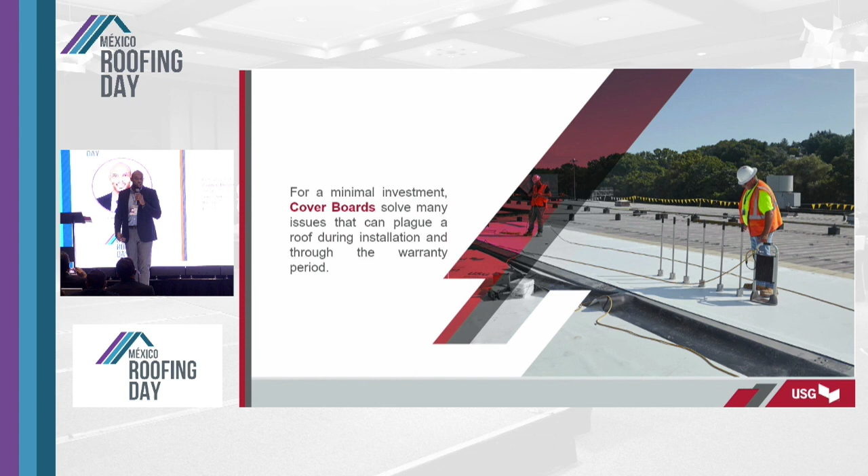All right, so just want to talk a little bit surrounding coverboards, why they're important, what it means for roofing, and one of the things that we all run into is there's so many different systems out there, right? Today we talked about BUR, we talked about PMMAs, different single-plies, so there's just a wide variety of different things that you can select.

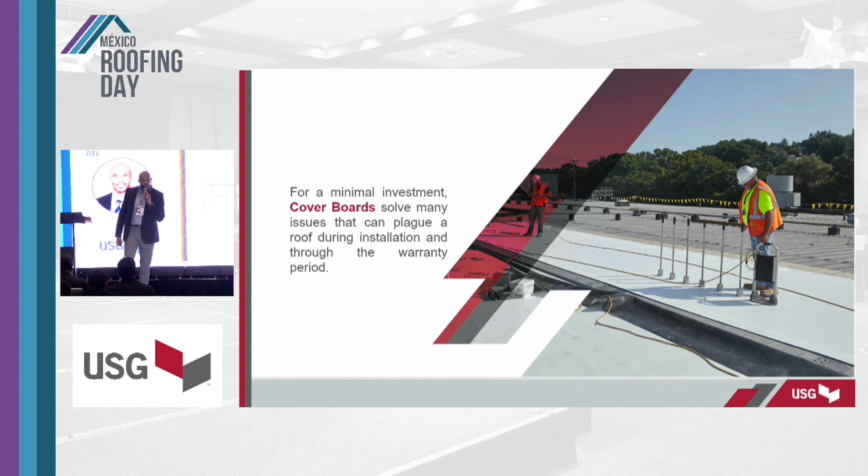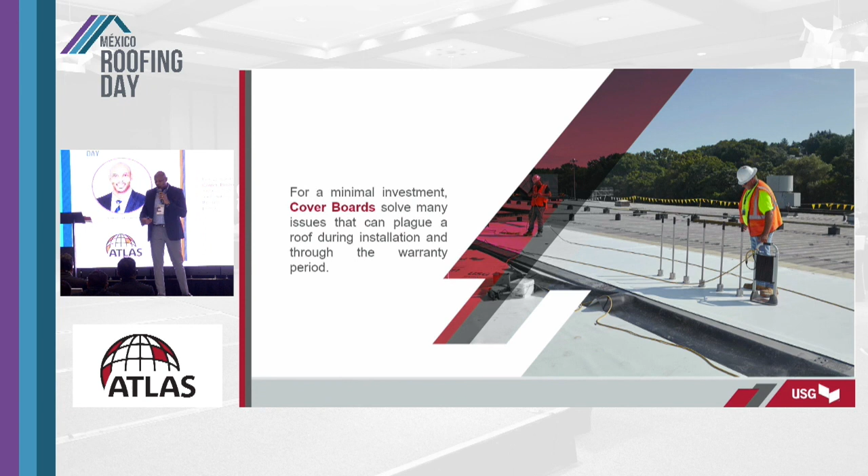From our perspective, including a coverboard in that system, which I know a few of the presenters mentioned today, will take that investment quite some ways, and I know even Brian from IIBEC talked about how it can come into a legal battle, right? And so including coverboards in there is just a small investment to protect that roof system as you move forward.

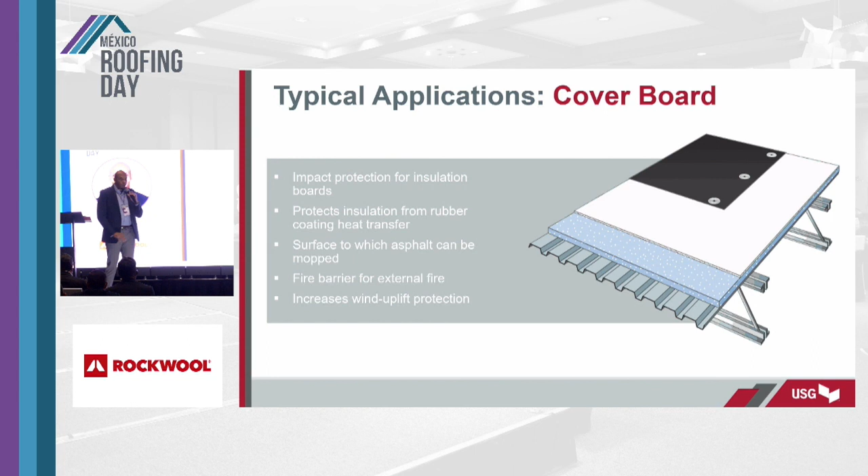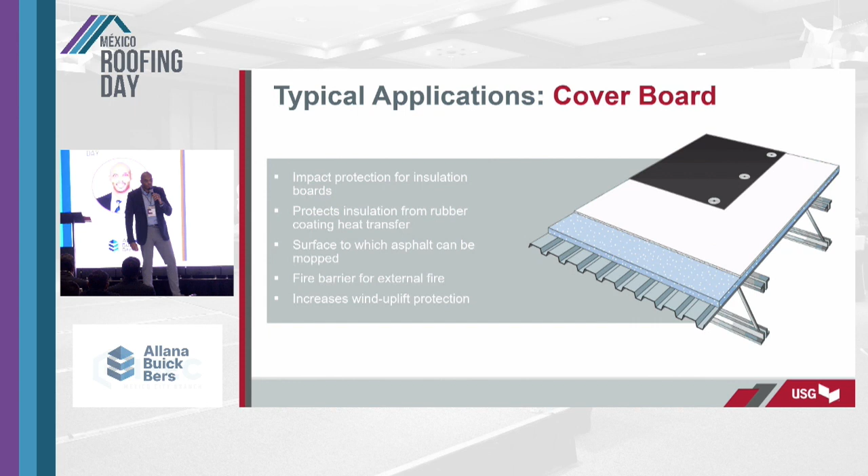So now talking a little bit about what that roof system looks like and where the coverboard comes into play. Number one, it's there right on top of the insulation, right below the membrane, to protect that insulation. It's there for heat transfer. A lot of times the contractors will fasten down the insulation and then low rise the coverboard on top of that, protecting it from the heat transfer from the fasteners going into it.

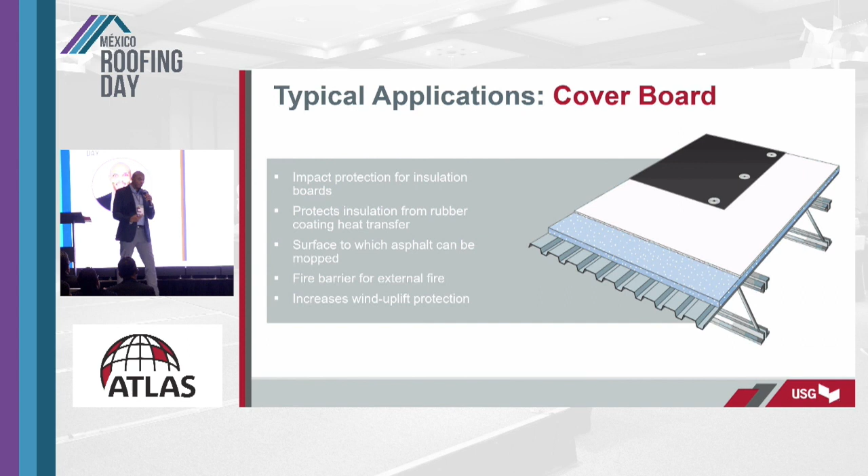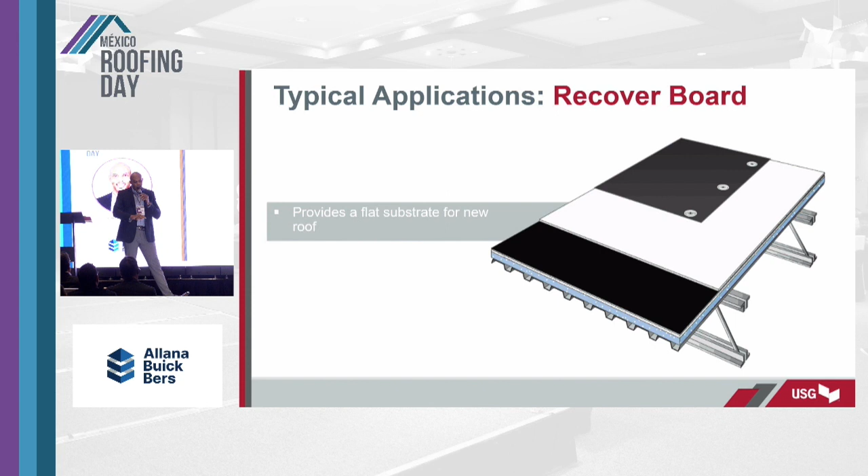It's a substrate where you can hot mop to, you can torch to, and of course it acts as a fire barrier, for wind uplift protection, and also hail. In addition, you can put it on an existing roof. So let's say your roof is towards the end of that life cycle. You want to put a coverboard on top of that for a nice, flat, clean substrate. It'll give you all the benefits that I talked about earlier, but also extend the life of that roof system. So in that application, it's a recoverboard.

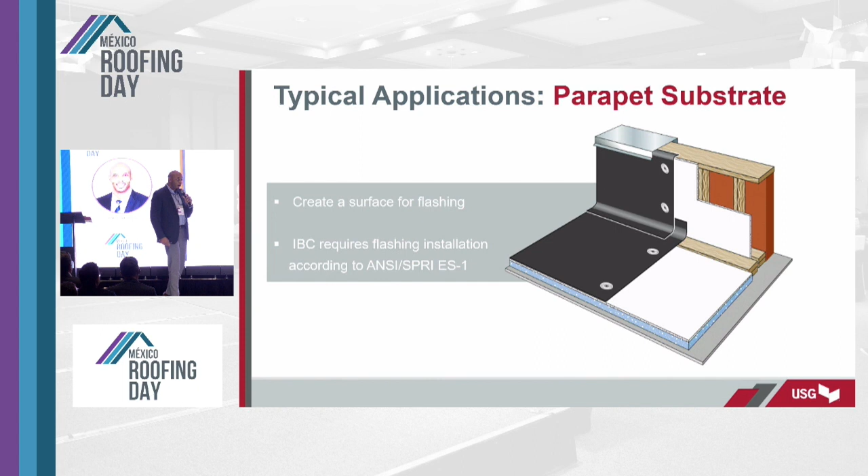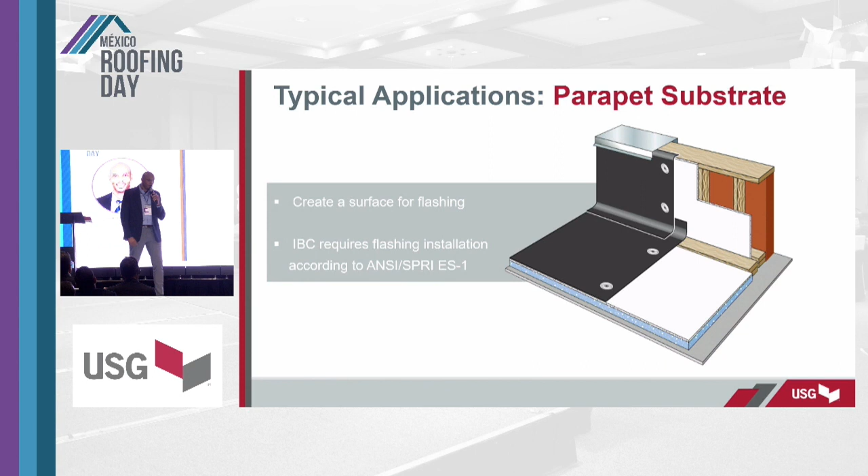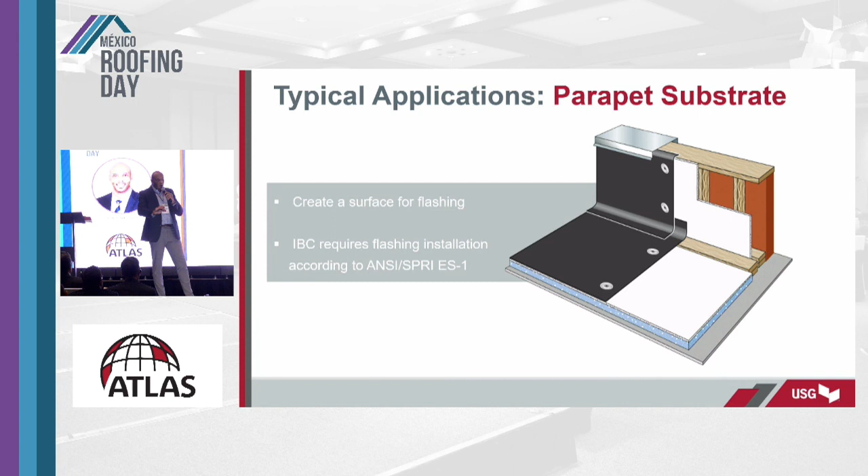And we talked about parapets today, how parapets are there for a fire application, and to enhance the wind uplift as well. So including a coverboard right on top of that parapet wall is important. Number one, it is the approved surface that you can adhere the roof membrane to. So whether it's single ply or mod bit or peel and stick, you can put that right onto the coverboard, which is on the parapet wall.

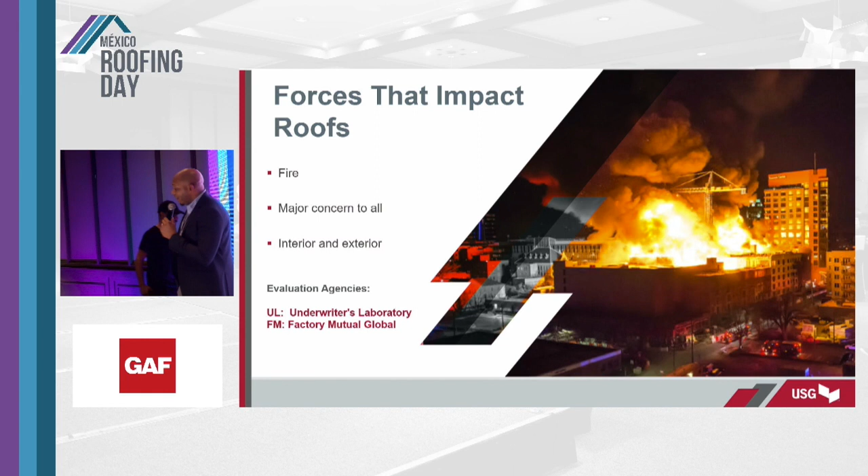So now we're going to talk a little bit about the different forces that impact roofs. I'm going to dive a little bit deeper into fire, maybe not as deep into wind as Melody talked about. We'll talk about foot traffic, and we'll talk about hail as well. So number one, fire, right? Fire is just a big concern. I know there was a presentation earlier that showed the Walmart building. That was pretty significant. And for insurance agencies, one of their biggest concerns is fire, hail, tornado, right? So they're always looking at those different things.

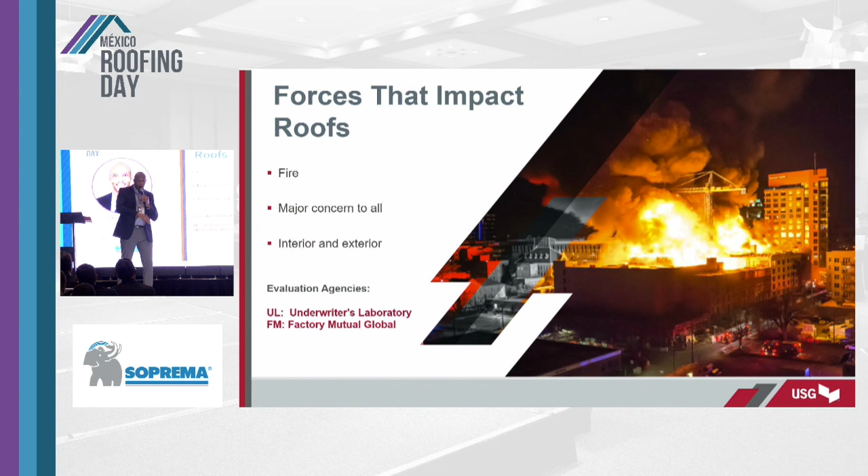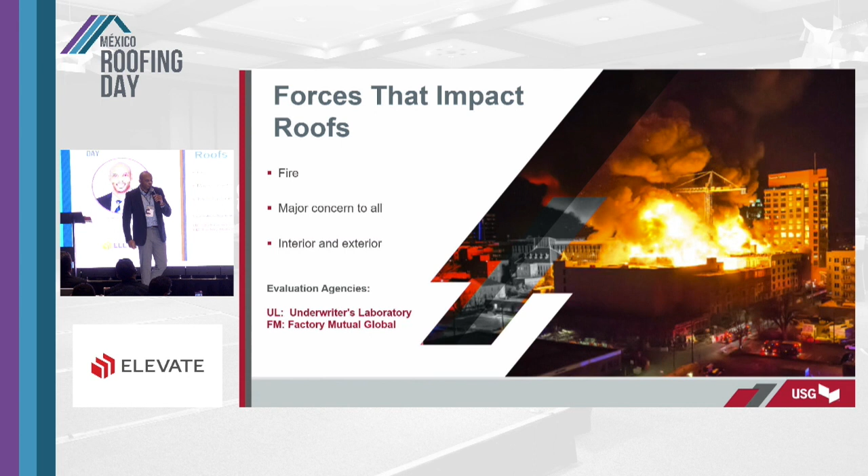And when you think about fire, you have to think about it from two ends, right? From inside the building and from outside the building, because it can occur from either end. And there's two different evaluation agencies that evaluate that. There's UL, Underwriters Laboratory, based in Northbrook, Illinois. And then there's Factory Mutual, based in Rhode Island.

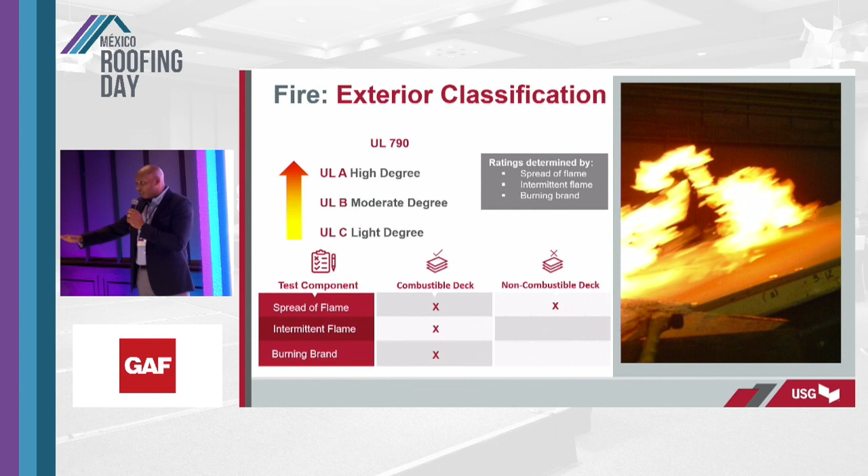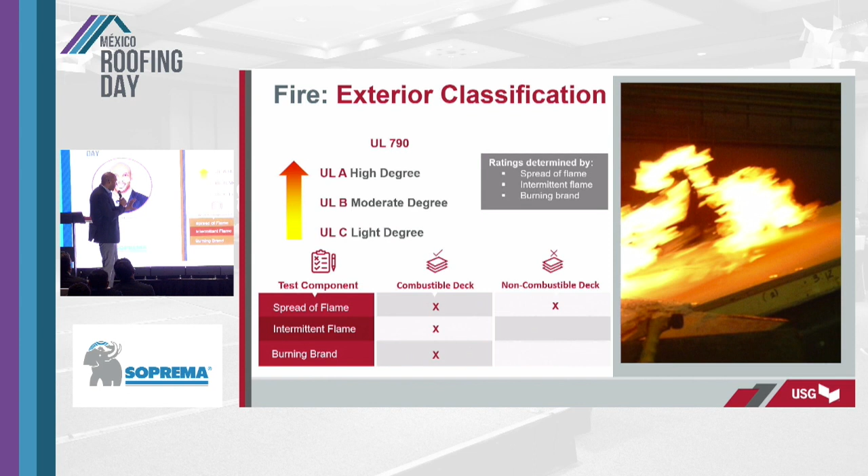So just to talk a little bit surrounding UL 790, E108, it was shown earlier how that applies to fires outside the building. So if there's a tree on fire, a building next door on fire, how do you prevent that fire from going on to your building? With that test, there's a Class A, Class B, and a Class C, Class A being the highest. And there's 3 different evaluations done for this test. I've seen it done many times, and it's a very stringent evaluation. It's extremely hard to pass, especially if you're going for a Class A with an unlimited slope.

So that image on the right side gives you an idea as to what it looks like. And so the first test is a spread of flame, and it's basically a flame that goes on for 10 minutes, and they measure the char line, right? So if you're less than 6 feet, it's a pass for a Class A. If you're less than 8 feet, it's a pass for Class B. Less than 13 feet, it's a pass for Class C.

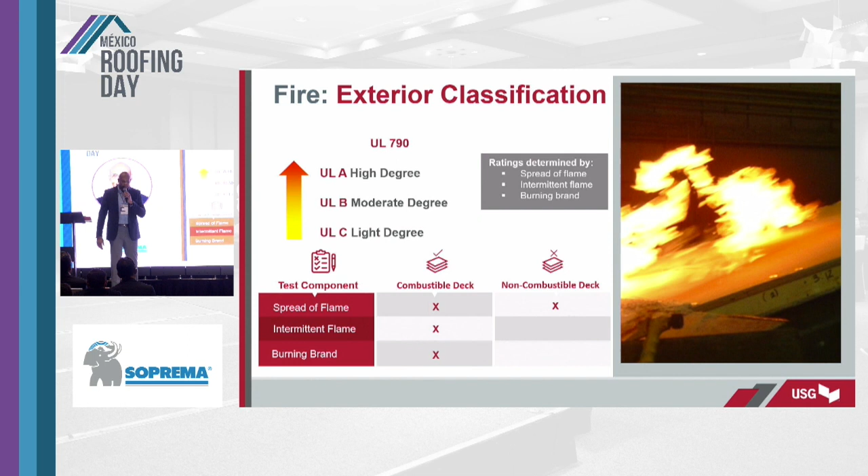The intermittent flame, this one's really challenging. That is a flame on for a minute and off for a minute. And what they do is they actually have a wind that's blowing as well at 12.5 miles an hour blowing on the system. And if there's any type of fire that ignites above the roof, below the roof, it's a fail. So in addition, with the intermittent flame, they'll have the flame going off and on, but also after an hour, which is for the Class A, they just have the wind blowing, and basically just see if anything happens at all whatsoever.

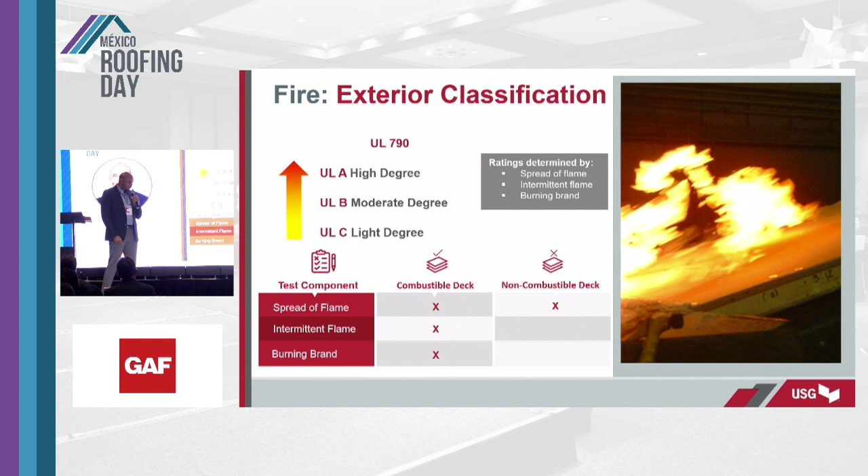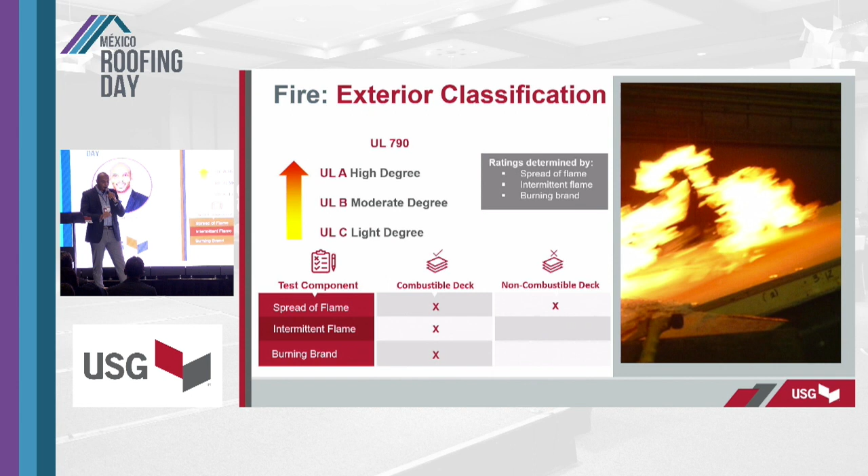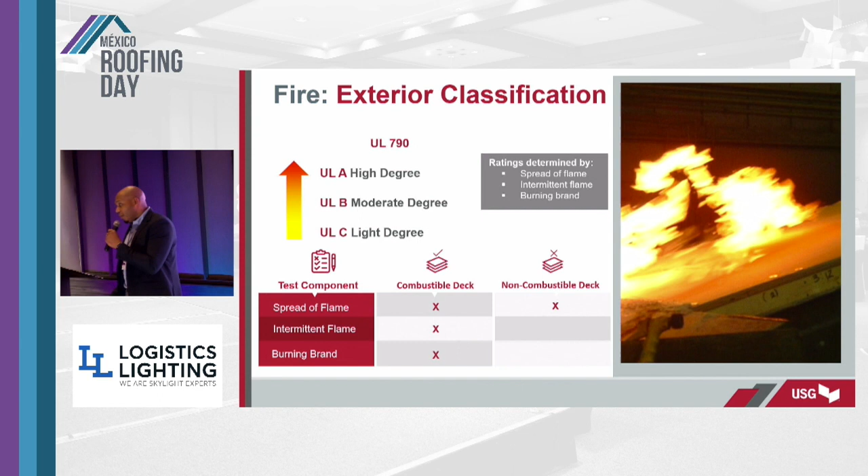And then there's a burning brand. They basically have a wood brand. They set it on top of the roof system, light it on fire with wind, and they measure to see if there's any type of ignition of the roof system. So again, it's looking at a fire on the outside of a roof. If there is something like a tree branch that falls on the roof that's on fire, that's where the burning brand comes in. And an intermittent flame is if there's a fire hitting it off and on. So it's a really stringent test, and the people that evaluate for it do a really good job to make sure that the materials going into the roof system are safe.

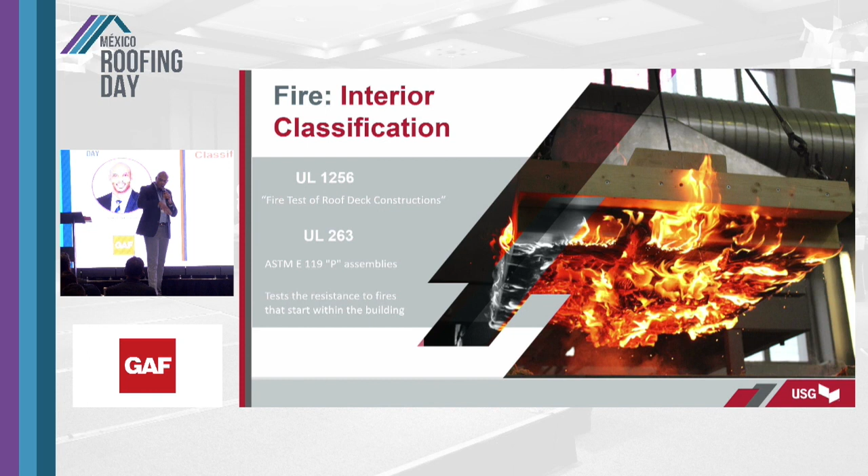And then there's fire from inside the building. I know earlier today we talked about the fires from the inside and how that affects things, and it spreads across the roof system. So a calorimeter test is one of those that are done. A lot of times it's referred to as the P assembly, so you get an hourly rating from the P assemblies. But again, it's just a fire that is done on the inside of a chamber. They'll light it on fire, and they want to measure how much fuel gets added to the flame, so how much that insulation melts and adds on to the flame.

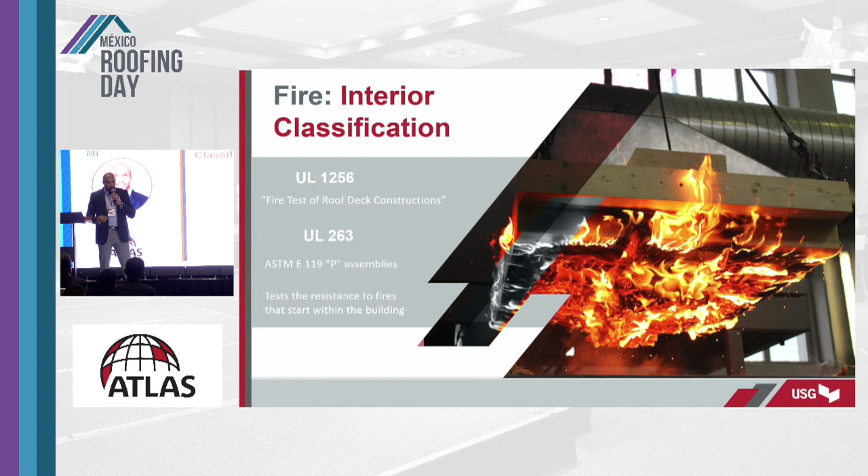And basically, depending on the pass-fail rate, you can fail pretty easily depending on how many combustibles are in there. However, putting a cover board in there as a thermal barrier right on top of the deck slows down the rate at which the fuel is added to the flame.

So let's talk briefly about wind uplift. As I mentioned, Melody, you did a really good job talking about wind uplift earlier and how you calculate it from ASCE 7 and so on. But again, it's a huge factor, especially in high velocity wind zones, obviously along the coast. Hurricanes can go from a tropical depression to Category 5 in a matter of a day, right? So that's really challenging and ties into overall global warming and the water warming. So from my perspective, we may see more and more high storms across the world.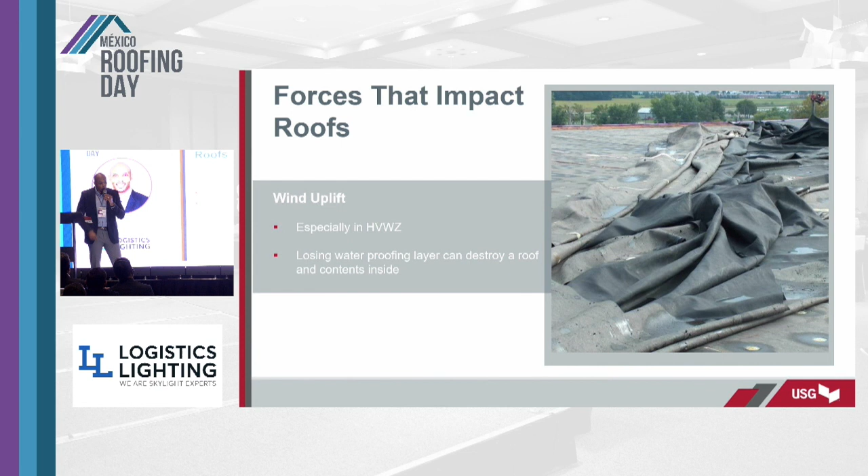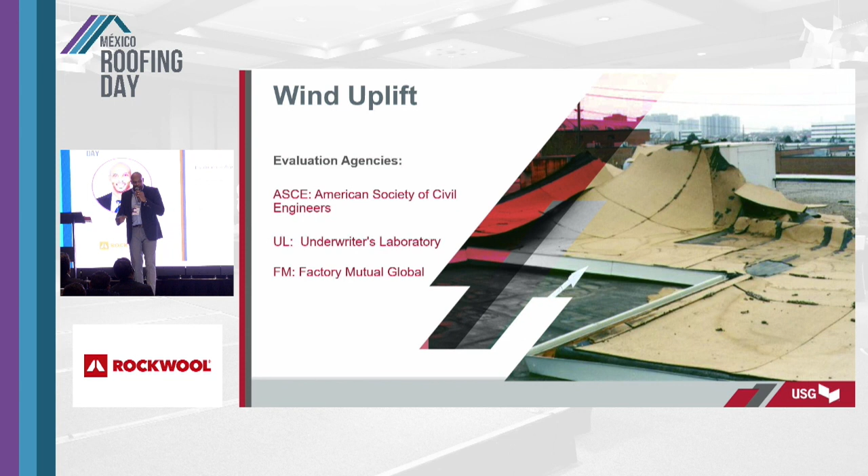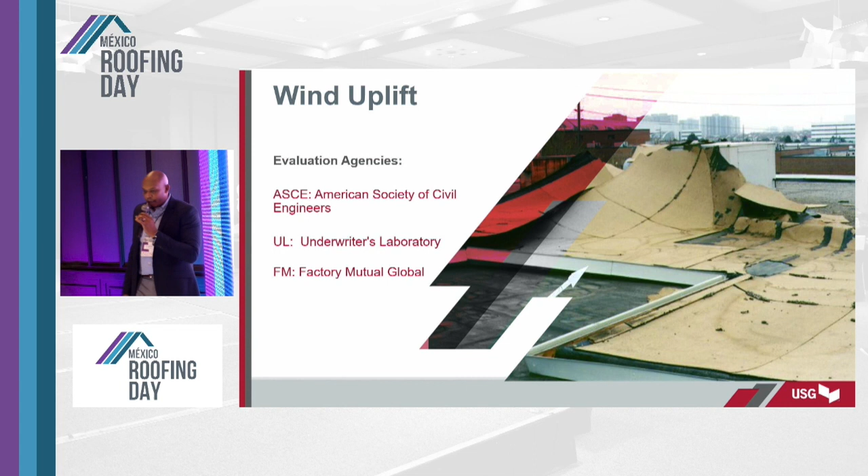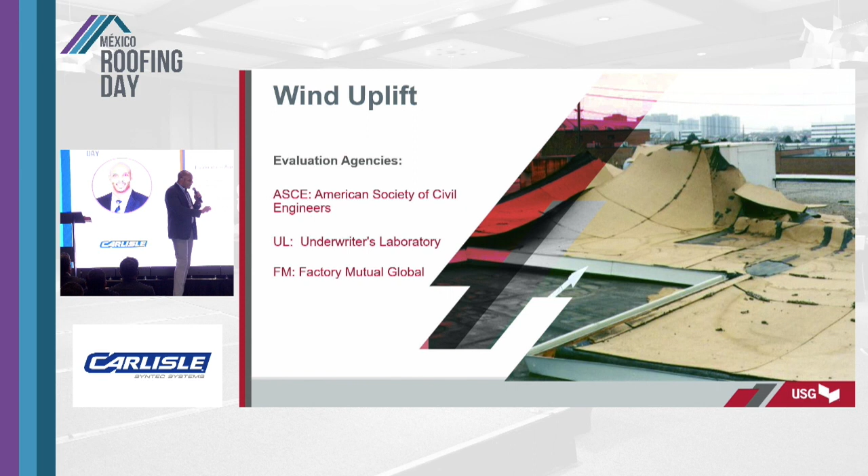So again, losing that waterproofing layer basically destroys the contents inside that building, destroys the insulation. So making sure you have a strong system that can withstand the winds is important, right? I talked about ASCE 7, so they basically run the calculations to determine, based on the height, where the building's at, the terrain, what type of wind load is there, and then there's UL and Factory Mutual that run the evaluations to determine how these play in. And again, Melody talked about RoofNav and how you can tie all that in to determine, hey, this is the wind uplift I need for this area.

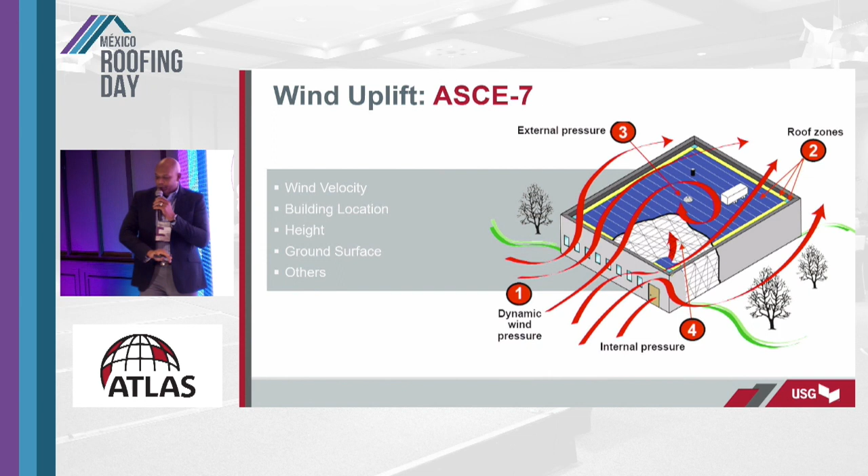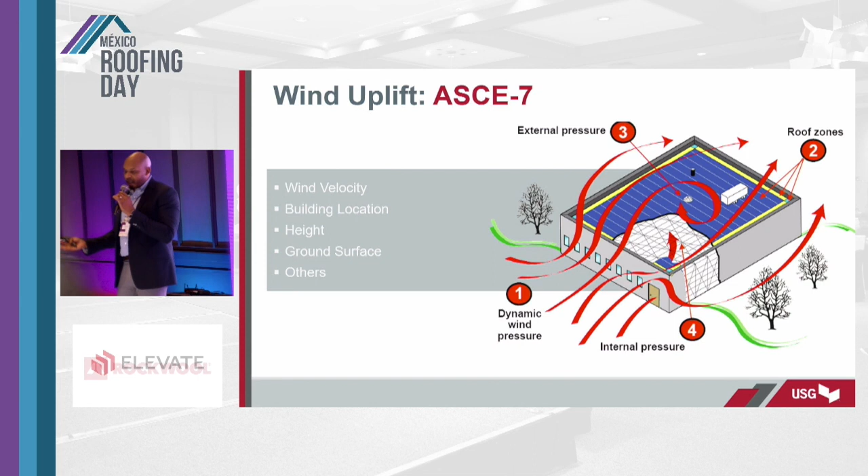And again, looking at ASCE 7, the wind basically goes across the roof system based on the velocity, the location of the building, the height, the ground, what type of building, if it's a school, if it's a warehouse, penetrations. But again, the corners have the highest wind load, followed by the perimeter, and then the field.

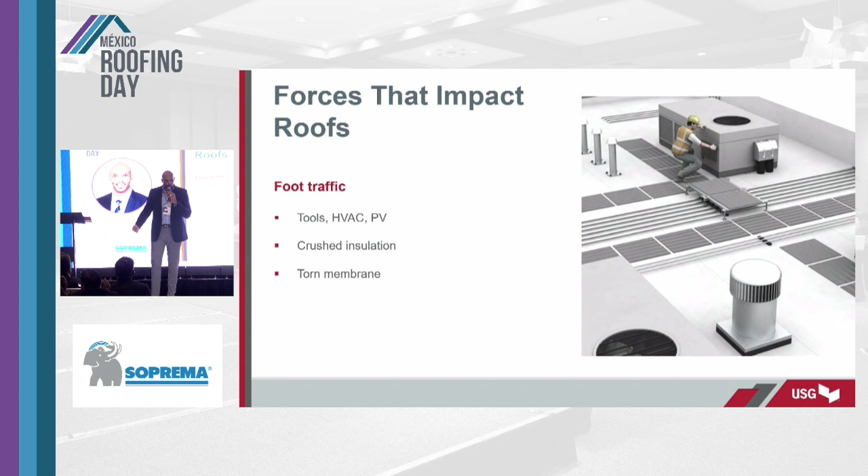Foot traffic. I know we talked about solar today and HVAC units. So going on top of a building to service those things or install solar units, which may happen 10 years after the building is built. Those are things that we think about when it comes to how we make sure that we don't damage the membrane, don't damage the insulation, and create a leak down the road. So again, it's just something to keep in mind as you're thinking about what you can do to keep this roof secure for the warranty period and make sure that we don't have any failures down the road.

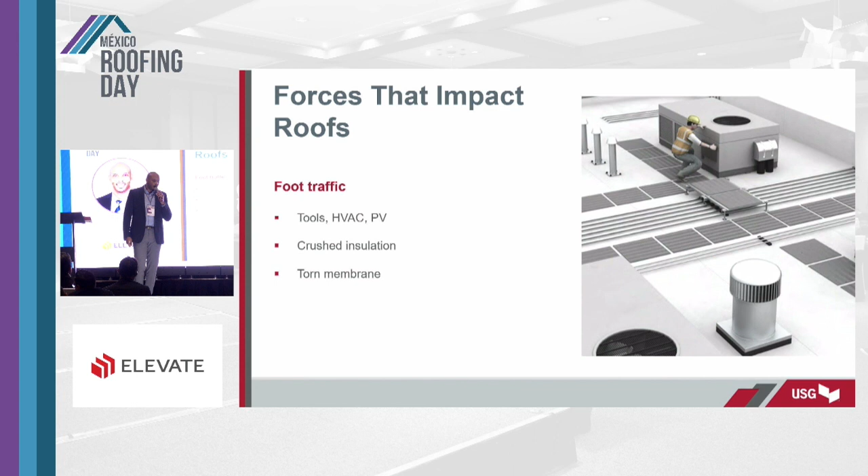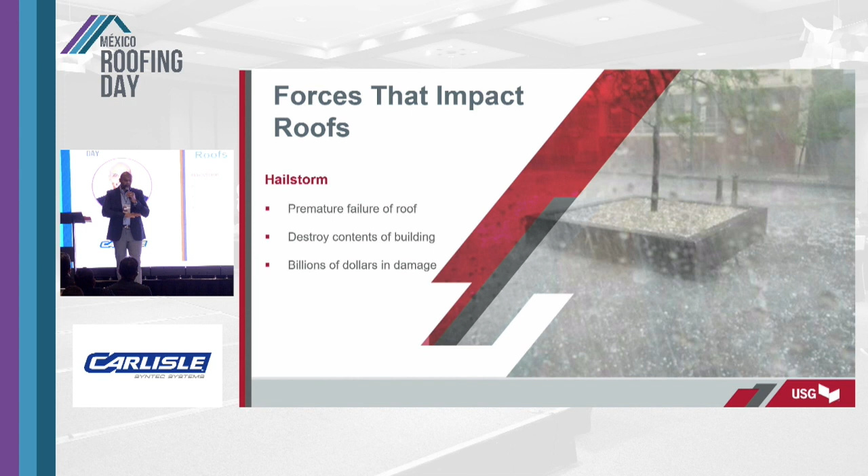And then hail. Hail is another topic that's coming up quite often. It's occurring more often and becoming more damaging as well. This too is another area where the insurance agencies are looking and saying, hey, what can we do to prevent the damage that's caused by hail? We see that there's nothing we can do to prevent it. It's going to occur, it's going to keep getting stronger, keep getting larger, occurring in many different areas, but what can we do to basically beef up the system so we don't have those failures?

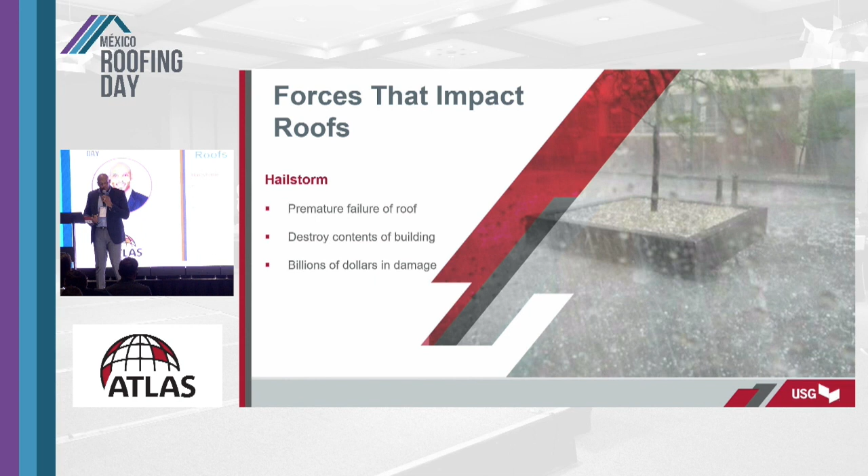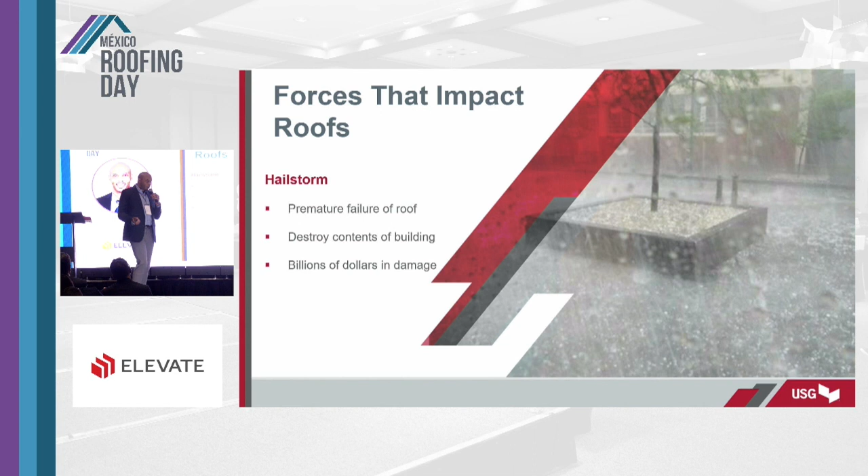So number one, it'll be a premature failure of the roof system. If you end up with a puncture in that roof system, sometimes we even see hail go completely through the roof itself, or if you have skylights, something like that. So it can destroy the contents, obviously with moisture coming in as well, because typically when there's hail, there could be rain as well.

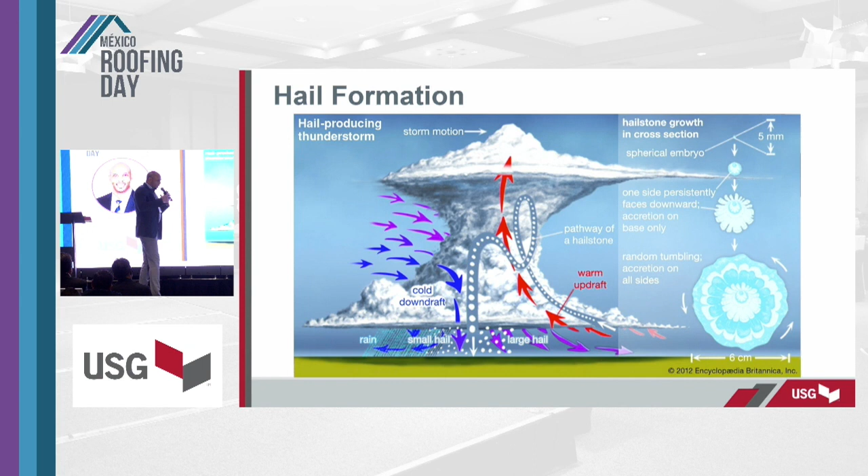So talking real briefly about hail and how it's formed, it's typically in a storm. You have some type of storm, a thunderstorm that's occurring, and with that you'll have some rain, but the biggest thing is you'll have a warm updraft, so warm air going up into this storm. And one of the things that makes the hail get larger and larger is the updraft that goes in. So the higher that updraft goes, the larger the hail gets.

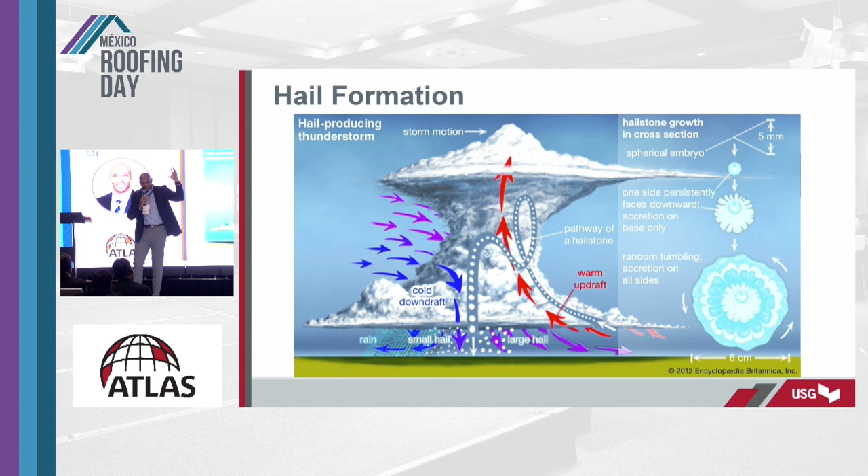So the hail will actually cycle up and down within that storm. And as it gets larger and larger, there'll be a point where the storm can't hold it anymore, so it'll fall down to the earth and create damage. And again, the stronger and higher that updraft goes, the larger the hail is that comes down.

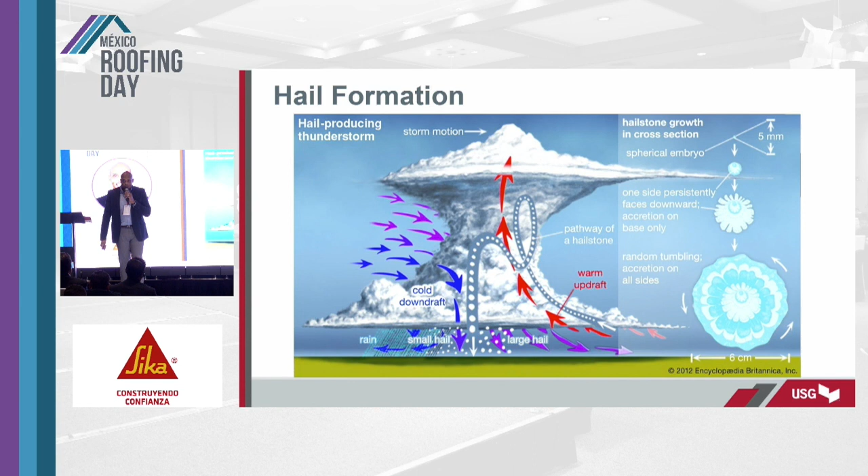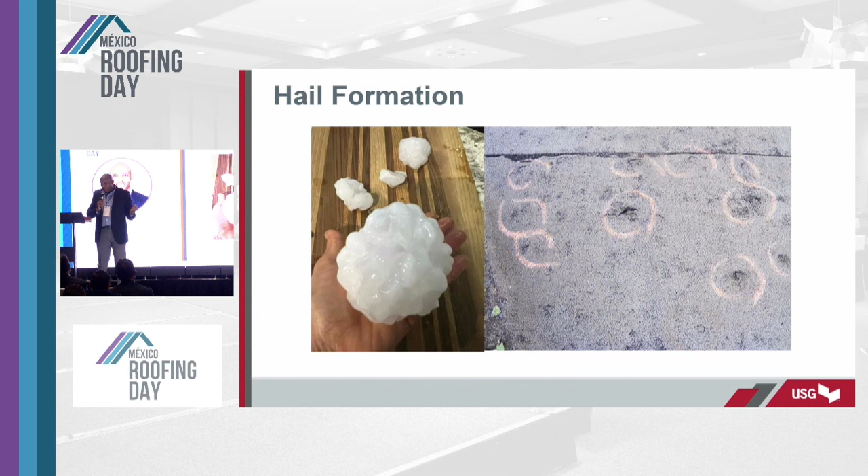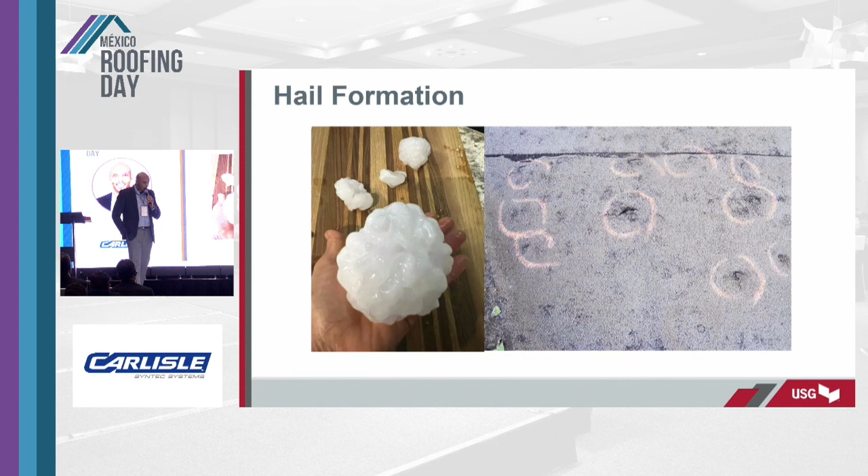So with that, you'll have hail. Hail can get really large. Sometimes it's golf ball size, pea size, but it can be softball size hail. 8 inches, weighing almost 3 pounds, that will do some damage. And especially when you're looking at roof systems, the type of damage that can be done there is significant.

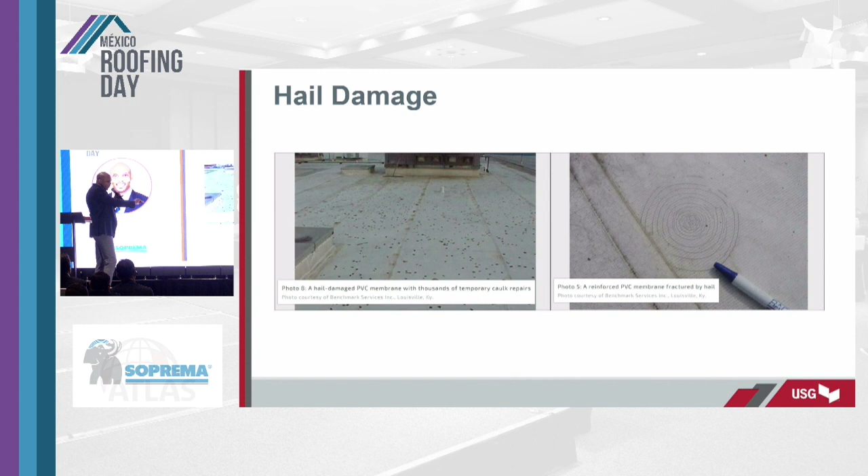So you can see here, just pointing out a little bit of damage that's been done on different roof systems and what's been done to just try and patch it for some time. So they basically put some caulk over some areas that have been damaged. You can see over there where you have basically a ring that's been formed and a bunch of different splits that occurred from that area that's been damaged by hail.

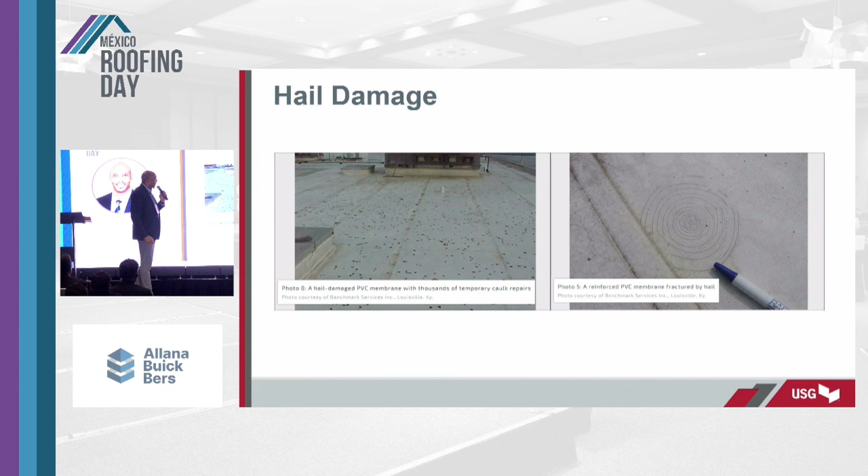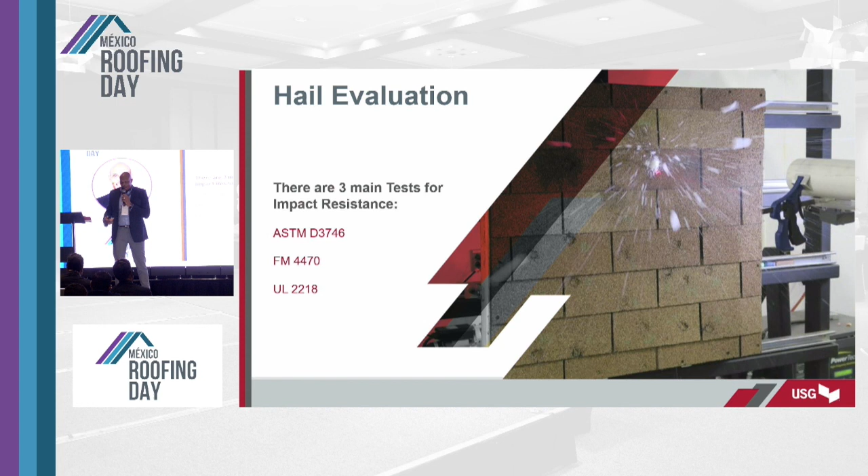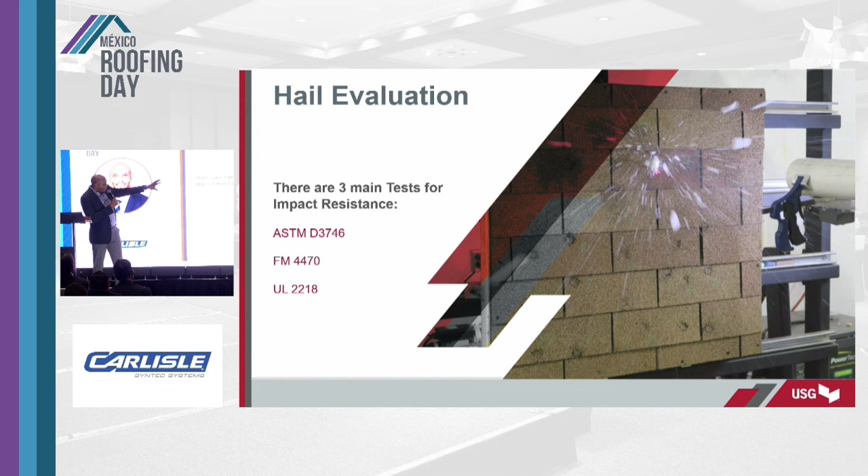So to evaluate hail, there are basically 3 different standards for hail: ASTM, FM, and UL. So we'll talk real briefly about each of them. I know today we talked a little bit about the cannon that shoots the ice ball out. So that's an image of it there going over some shingles and evaluating shingles for hail.

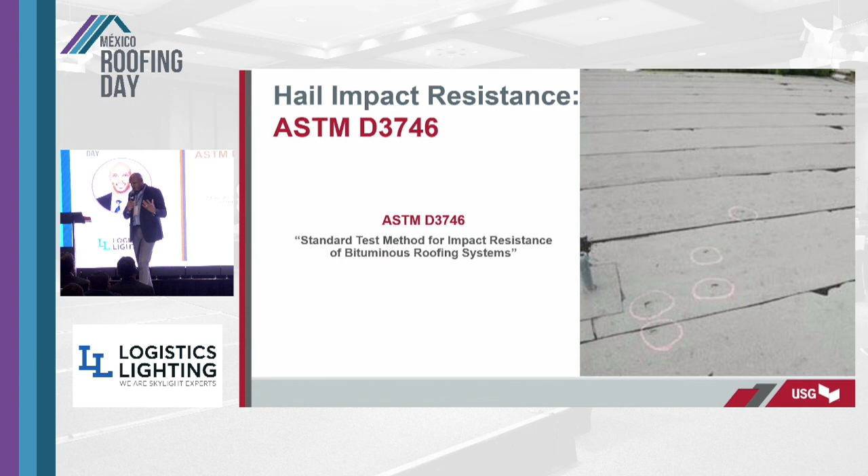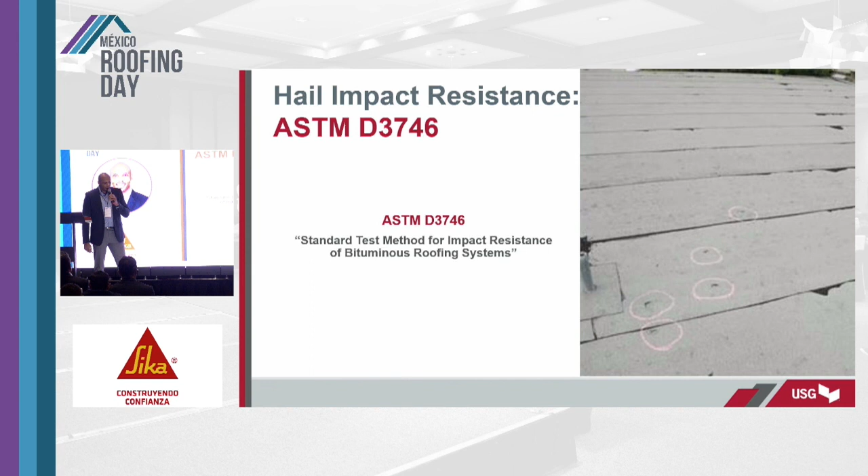But looking at ASTM, ASTM D3746, that's basically a metal sphere that is dropped to measure hail. You can do that on the roof system itself. You can do it on assemblies that are done in a lab and so on. This one is not necessarily used too often. The two standards that are used the most are UL and FM.

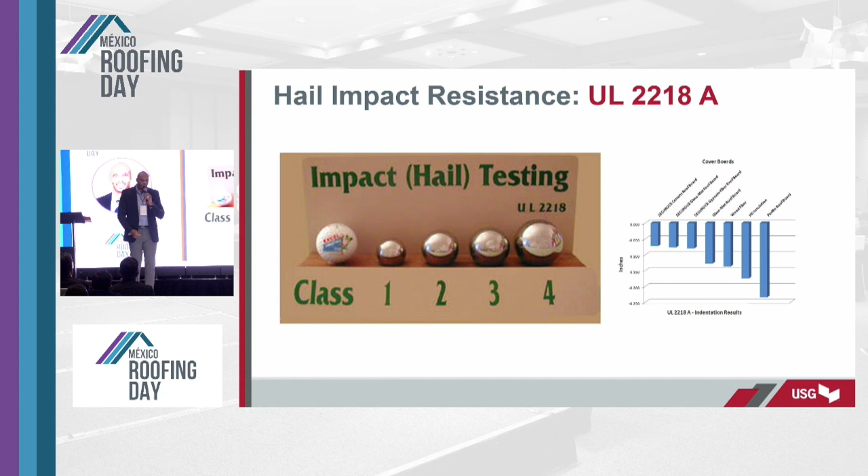And so you're dropping that all the way down 20 feet, and the graph just gives you an idea as to how high-performing cover boards do compared to lower-performing cover boards out there, measuring that indentation, basically going from 7/100 of an inch all the way to 1/4 of an inch. And so the indentation is important. How much is that membrane going to flex into the roof system? And the less it flexes, the less likely it is to tear.

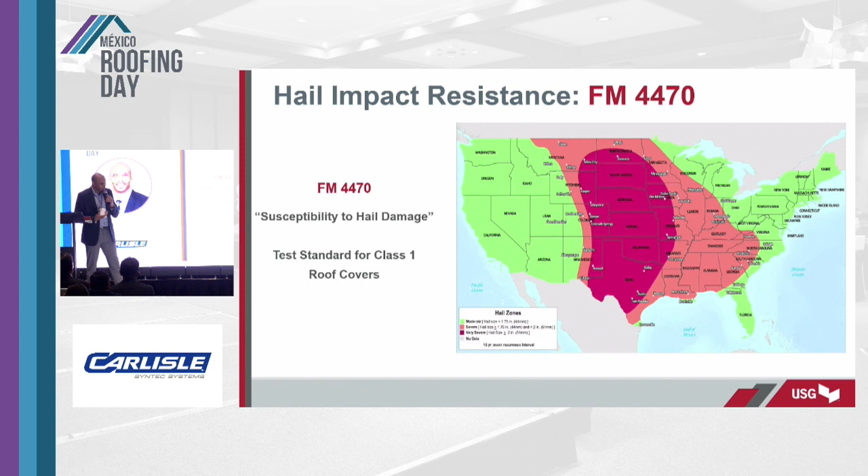And then talking about FM, FM has 3 different categories for hail. They have moderate hail, and this is a map of the US just showing where moderate hail locations are, or where you have to have a moderate hail classification in your roof assembly. And then you have severe hail, and then very severe hail.

For the moderate hail and severe hail, they basically utilize that same steel ball that they had for class 4 on the UL, the bigger steel ball. One of them is dropped from about 6 feet, and you measure indentation. You measure to make sure that there's no puncturing on the roof system or any damage to the cover board. And then the other one's dropped from about 12 feet, and again, you do the same thing. So those are somewhat easy tests to pass.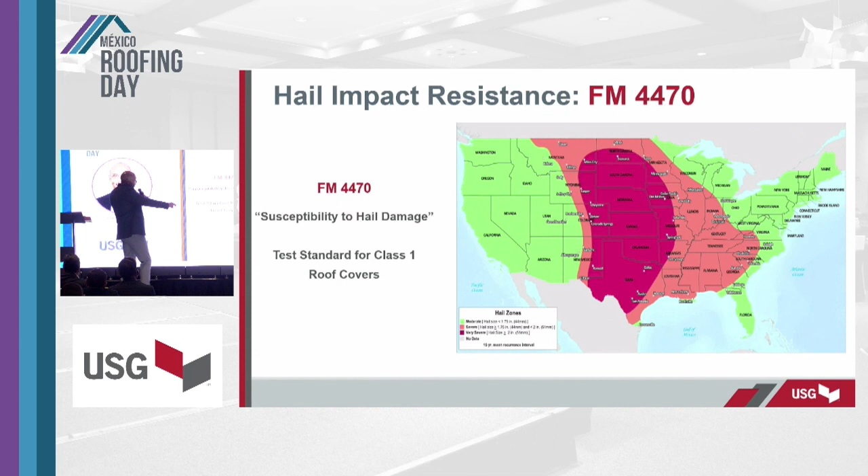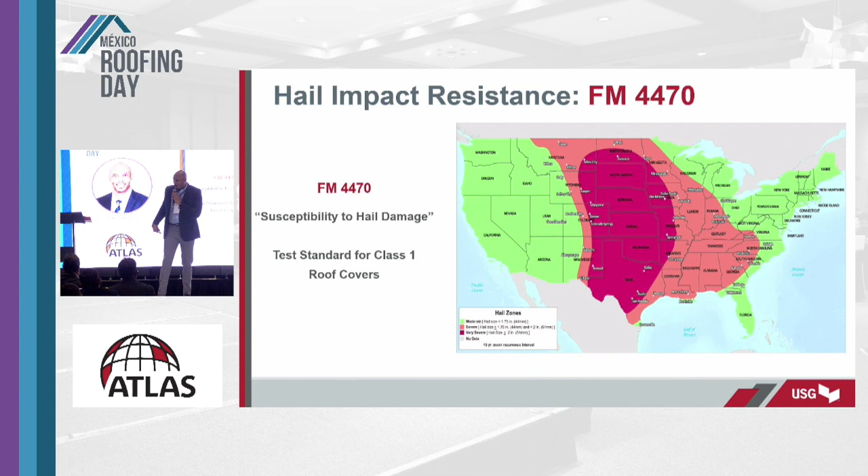But again, if you wanted to put a roof on in any of these regions here, you basically have to follow FM guidelines if it's an FM insured building. We'll dive a little bit deeper into the very severe hail, as that's the newer one and something that comes up quite a bit: hey, how do I pass that? What does that look like? And what system can I use?

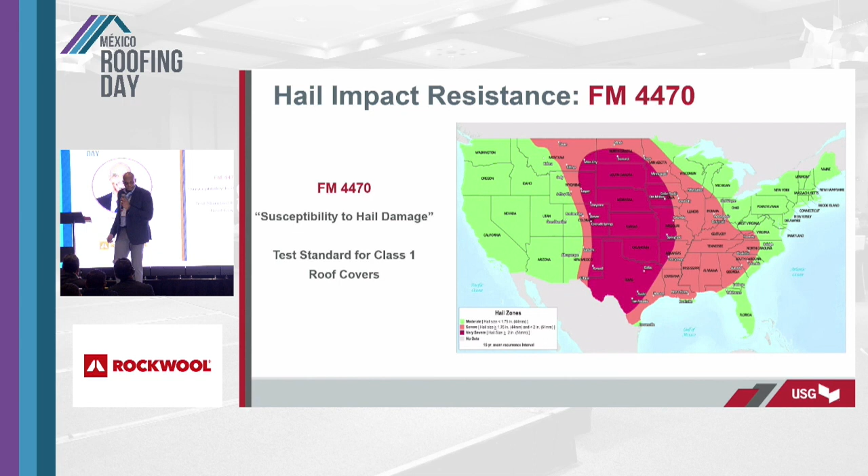So for very severe hail, they basically run 2 tests. One test is with virgin material, and one test where they heat age and UV age the membrane for 1,000 hours, simulating aging on a roof, since hail may not happen as the roof is installed but could happen 10 years down the road. So they compare what happens then versus when it's new. They do both tests, but if you don't pass the first one, there's no need to do the second.

What they use is a 2-inch ice ball, like the one you can see there. I love ice balls in my drink actually, I use them for my bourbon and everything, so that's where I have these ice balls.

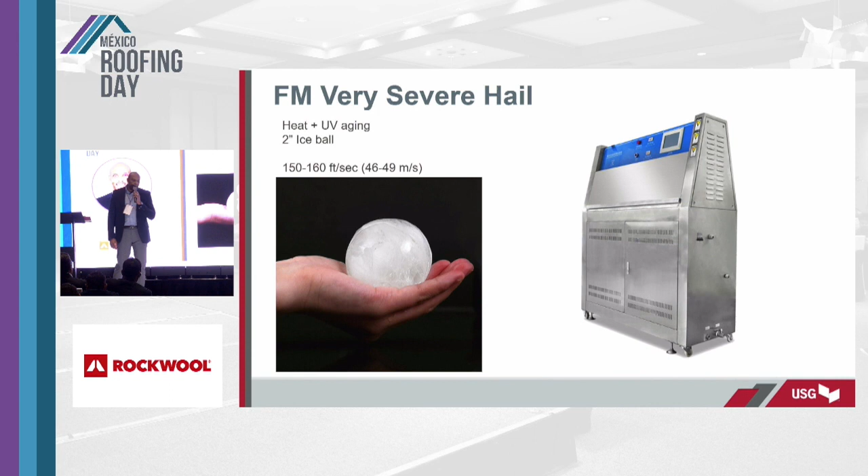They shoot that ice ball out of a cannon at 150 to 160 feet per second, which is about 49 meters per second, or roughly 176 kilometers an hour, about 110 miles an hour. So it's going pretty fast when it hits the roof system, and then they measure to see if there's any damage to the membrane, the cover board, or the back of the cover board.

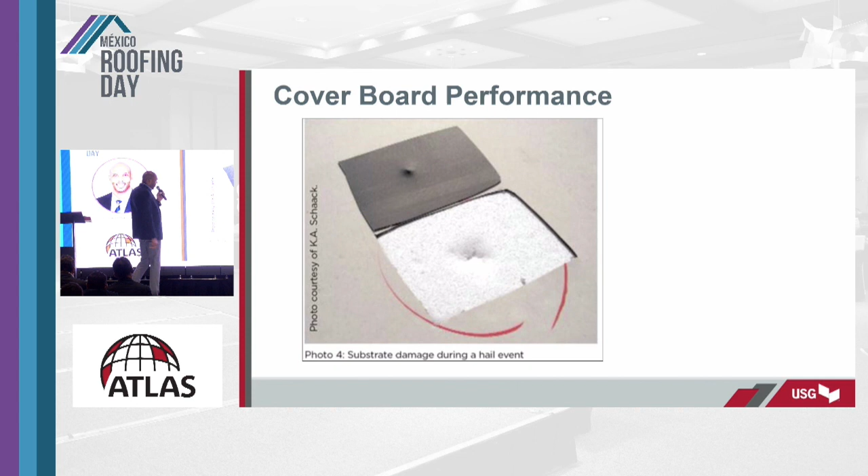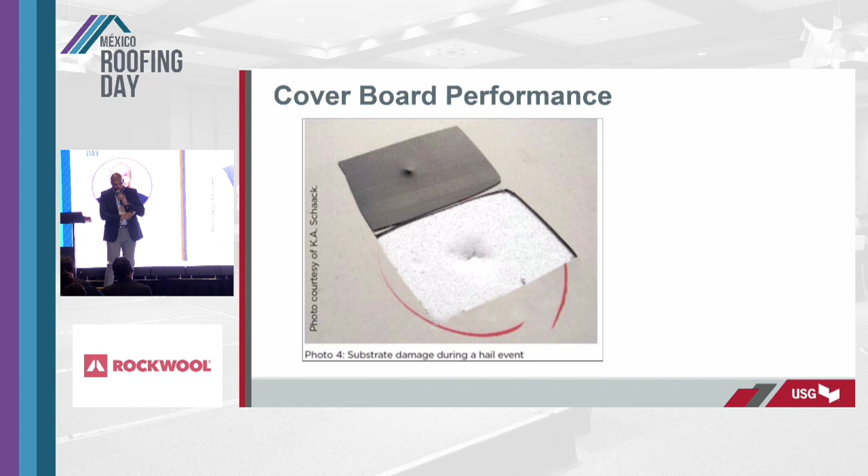So here's an actual test that occurred. You can see the damage that happened to the membrane and to the insulation. Obviously in this one there's no cover board, so the damage is pretty significant.

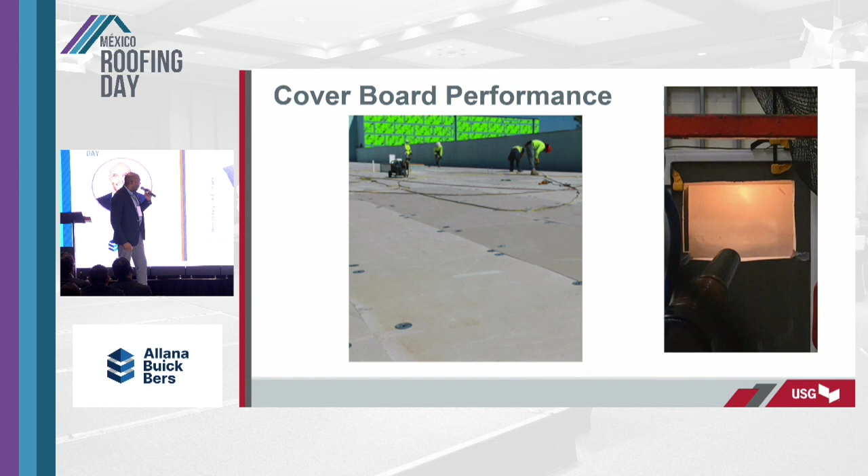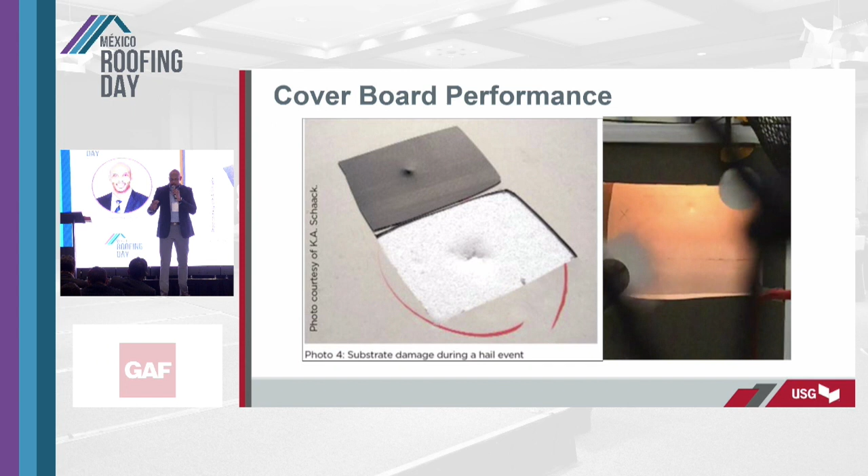This next one, I'm not sure if the video plays... no, okay, the video doesn't play here. But there was a video showing an ice ball being shot out of a cannon right into a roof system that doesn't have a cover board. You can see the indentation pretty good, and that's the ice ball flying back at me as I'm recording this.

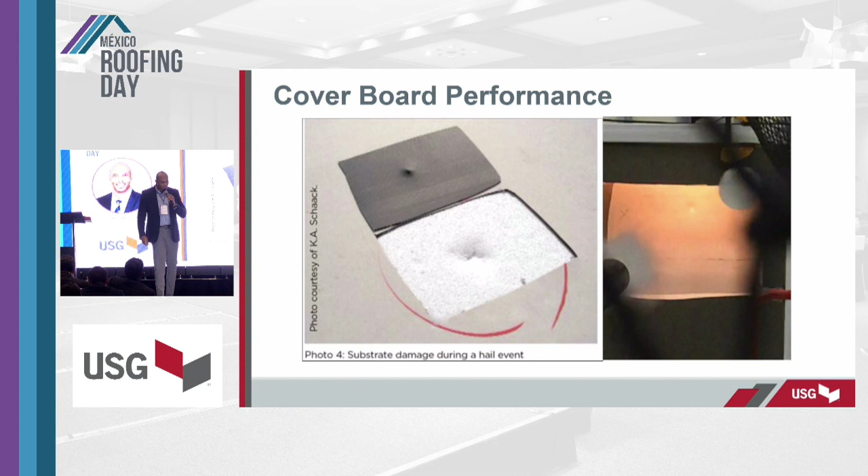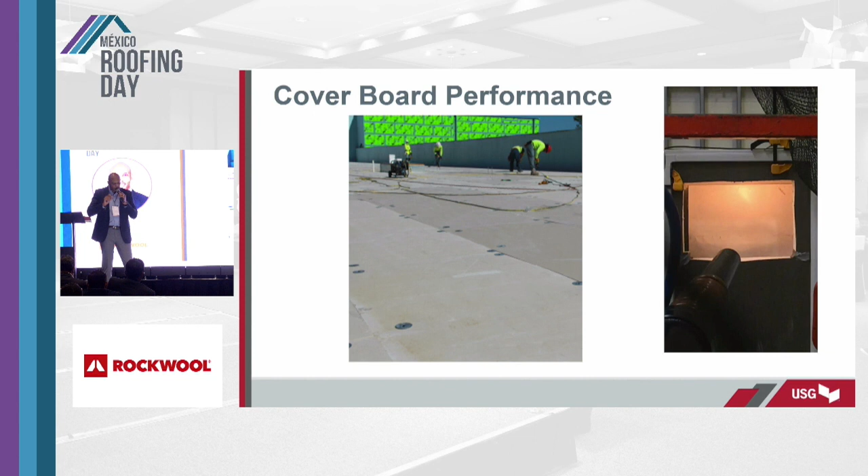This one here would have been another video, showing the ice ball shooting out at an assembly that does have a cover board. This shot is after the test, and you can see there's no indentation on the actual cover board or on the membrane itself, so it performed really well in that assembly.

Oh, there it is, so that's the video right there, and you can see the ice ball shot right out at it.

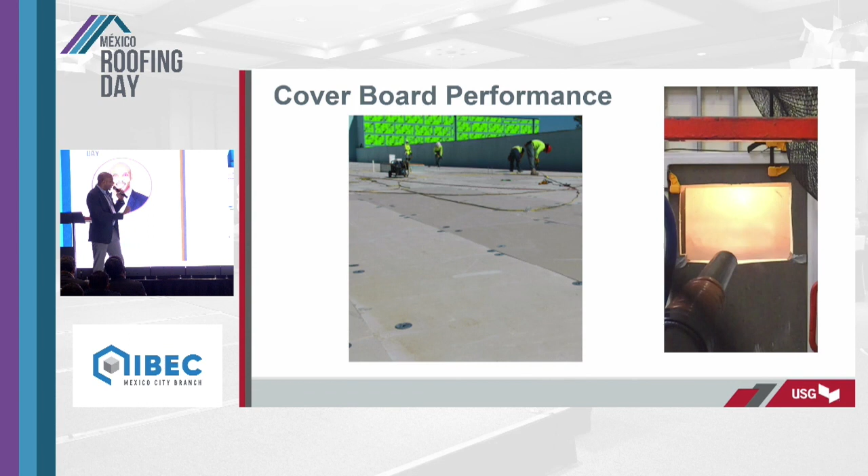So we'll talk briefly about different cover boards out there and their attributes, primarily focusing on high-performing hardboards on the market. First up is glass mat cover boards. These can be used in basically all roofing systems. You get a Class A fire rating, very high wind uplift values for high velocity wind zones, and very severe hail ratings, so no concern there when it comes to FM ratings. You also get mold and moisture resistance, and high compressive strength is important to look at for passing hail or wind tests.

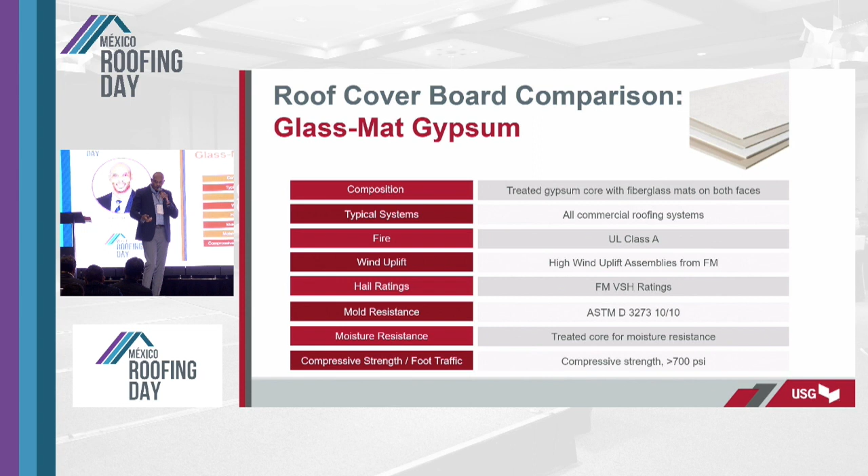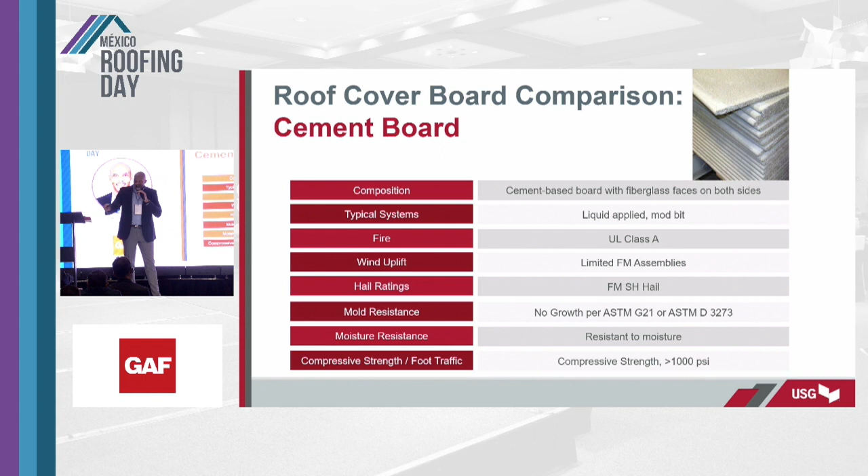There's also cement boards on the market. These are basically a cementitious core with some type of glass fiber on both sides. They're non-combustible, so you get a Class A rating, nice high wind uplift values - I've seen some cement boards hit that 990 PSF rating Melody mentioned - severe hail ratings, no mold, resistance to moisture, and very high compressive strength. One thing to think about: both the glass mat boards and cement boards have a nice scrim or glass facer layer that can distribute the load and work out really well when it comes to hail.

Gypsum fiber - this product is a high density gypsum blended cellulose fiber. As the last presentation mentioned, tree huggers have roofs too, and this product is very green, 95% recycled material. It can be used in all roof systems, gets that Class A fire rating, extremely high wind uplift values, very severe hail ratings, mold and moisture resistance, and extremely high compressive strength, which allows it to do very well when it comes to impact.

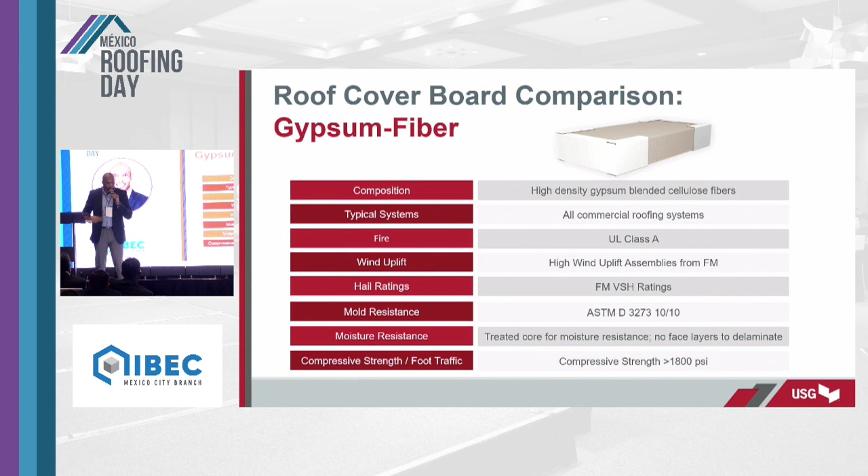And that covers it from me, so I don't know if we have any questions.